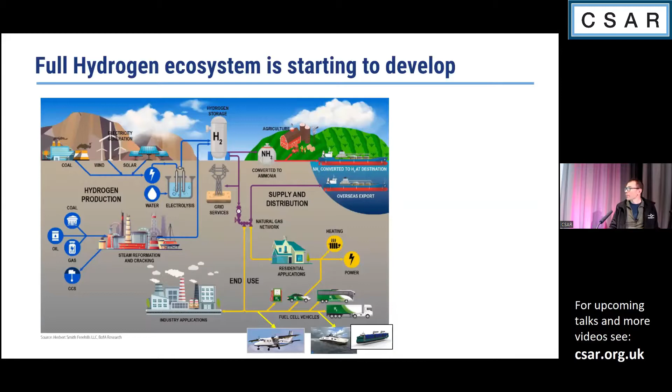Okay, so that green hydrogen can be used not only in transportation and in heating our houses, but also in very hard to abate processes. For example, in steel production, cement production or fertilizer production. And the green hydrogen will be used in those industries as well. So why are we talking about hydrogen now?

Because, as I said, hydrogen can be used in a variety of different applications which are very hard to abate. But also, the price evolution of hydrogen is incredible. You can imagine what happened to the cost evolution of renewables. About 20 years ago, it was prohibitively expensive to use solar and wind power generation, and now they are very competitive with traditional power generation.

Why? Because there was a lot of government support, of course, and the scale actually generated the decrease in the cost of technology. The same thing is going to happen with hydrogen. So the cost of the electrolyzers is decreasing. The cost of the renewable power generation, which is used to produce hydrogen in these electrolyzers, is decreasing as well.

So net, you will see that in the next 10 years, the price of hydrogen will decrease from today's, let's say $6 to $10 per kilogram, to about $1. So we are expecting a drastic decrease in the cost of hydrogen in the next years.

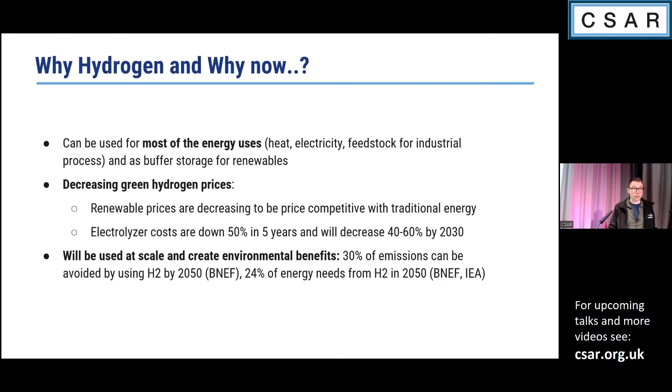And actually, a lot of very respectable sources of information, research, and analytics, for example Bloomberg New Energy Finance and the International Energy Agency, are predicting that there will be quite significant uptake of hydrogen. For example, 30% of all the emissions will be avoided just by use of hydrogen, and about a quarter of energy will be produced by using hydrogen.

So now, why are we thinking about hydrogen in aviation? Because today, aviation is contributing about 2 to 3% of global CO2 emissions. But this is direct emissions. So if you calculate the environmental impact from burning traditional fuel and using it for propulsion in aviation, then the environmental impact will actually be 5 to 6%.

Some researchers say that it can be as high as 10%, because there is not only direct CO2 production, but there is also nitrogen oxide, there is soot produced, and there are contrails which you can see in the skies when the airplane passes by.

And a lot of other industries are doing quite a bit to abate or decrease environmental impact. And if aviation doesn't do anything, we very easily go from about 5 to 10% of environmental impact to about a quarter to 50% of the environmental impact. And our travel, even now, is not guilt-free, but by 2050 it will be absolutely not guilt-free.

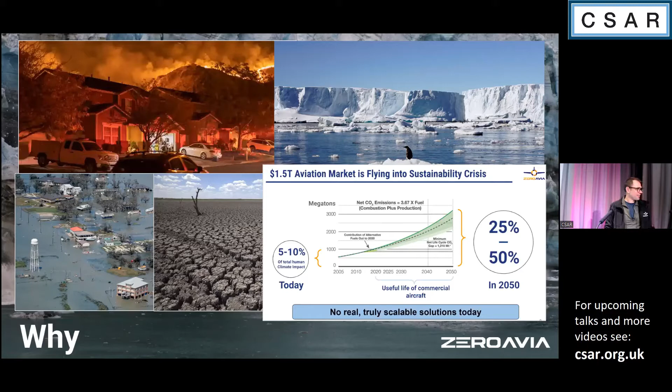And this is exactly why there is quite a bit of research and development going on right now into how to actually decarbonize aviation. And there are a lot of different techniques or sources of fuel which are considered.

And I guess the main ways to decarbonize, on top of course of the improvement of efficiency of the traditional engine and improvement of the aerodynamics of the wing, et cetera, which can reduce the emissions by about a quarter, or 25%. So then the rest will still be emissions from burning the fuel. So what are the alternatives?

The alternatives are, for example, battery electric. So we drive Teslas, we drive electric vehicles, and you can see that there are at least no tailpipe emissions which we generate by using electric vehicles. But unfortunately, battery electric is not scalable.

I think one of the executives in one of the airlines said that in order to actually fly an Airbus 320 some considerable distance, you need to have, I think, 80% of the aircraft filled with batteries. And that will allow you to pretty much just take off and land.

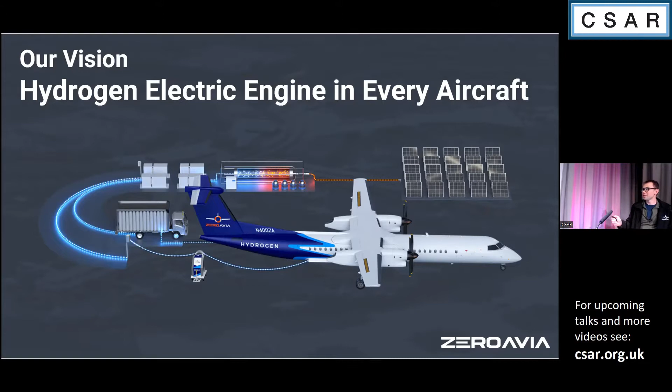So you can actually anticipate situations where the airports will be pretty much independent in terms of energy—locally produced electricity, locally produced hydrogen, and then we use that hydrogen for the aircraft.

So what does ZeroAvia do? I think what we are doing is basically solving technological blocks which will enable what I just talked about.

So the propeller is not what we are doing, but the propeller is connected to the shaft. On the shaft, we have an electrical motor, similar again to the electrical vehicle.

So the electrical motor is powered by electricity, which is produced inside the hydrogen fuel cell. And that hydrogen is stored on the aircraft in some sort of storage.

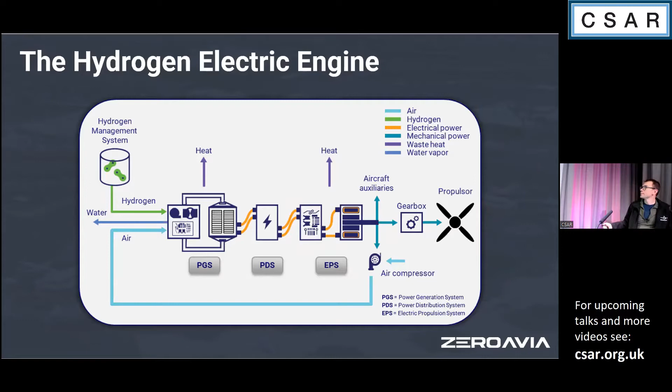So our roadmap includes, of course, flying small aircraft and then going to larger aircraft, and going all the way to intercontinental, long distance flight using hydrogen.

So we have already flown the 6-seat aircraft in 2020, and at that time we were located at Cranfield Airport and Cranfield University.

Now we have just finished ground testing of our 19-seat aircraft, and hopefully in the next couple of days we have a date in mind, but weather in November in that part of the country can be quite unpredictable. But hopefully we are going to fly the 19-seat aircraft in the next few days.

That will be the largest—when we flew the 6-seat aircraft, it was the largest commercial size aircraft flown in the world using hydrogen fuel cell technology. Now, when we test the 19-seat aircraft, we will set up and break another record, and we are going to then work on larger and larger aircraft.

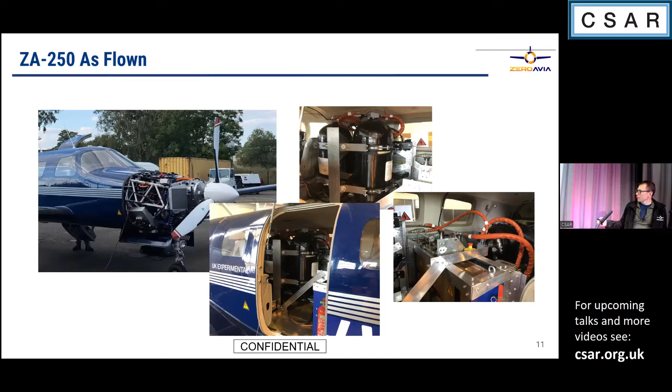And it was flown in September 2020. We had pretty impressive coverage from Sky News, BBC, etc.

And it was a very important point for aviation in general, because when I joined ZeroAvia about 3 years ago, as I said, pretty much nobody talked about hydrogen in aviation. If you went to conferences, there would be discussions about battery electric, about sustainable aviation fuel, but nobody believed hydrogen could actually play a significant role in aviation.

And it's amazing how things have changed—hydrogen is now actually considered the only scalable solution in the next few decades.

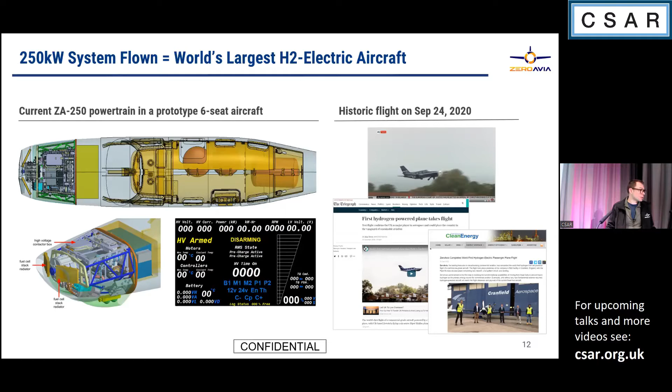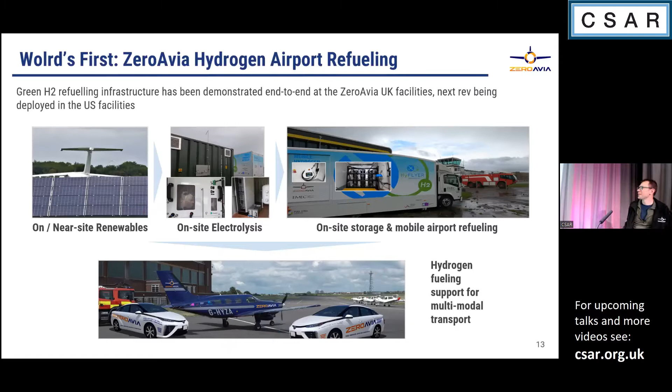And this is how small the team was. So when we flew the aircraft 2 years ago, we had about 10 people who actually worked on this.

Now we have about 130 to 140 people here in the UK, and about 50 to 60 people in the States, where we are originally from. So now we can call ourselves a UK and US company, not a US and UK company.

So when you're a pioneer in the field, it's actually hard to depend on others, and this is what we realized in the implementation of our powertrain. It turns out it's even harder to do in aviation, because every single component you put on the aircraft needs to be aviation certified.

It needs to be traceable. Every single nut and bolt you put on the aircraft, and in particular on the engine, needs to be traced to its origin.

Therefore, we strongly believe that to enable our innovation, we need significant vertical integration. And this is exactly what we're achieving by making our own electrical motors—we're currently testing, I'd say, the best-in-class, highest power density electrical motor, in our lab.

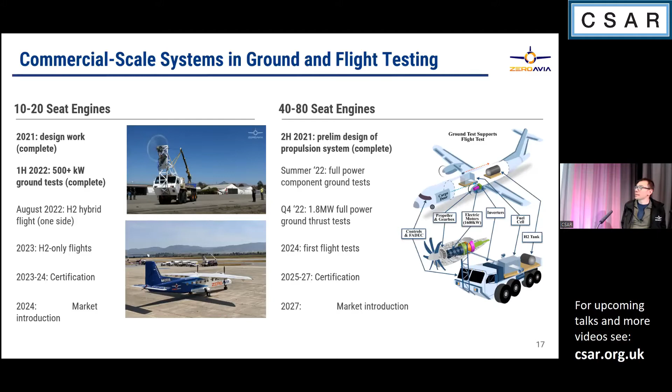We already started development, as I mentioned, of the electrical motors and hydrogen fuel cell systems, which we are testing in the labs. They will enable us to do tests on the ground, and we already have a bigger setup. It's not the flying El Camino anymore, it's a former military truck on which we are placing our Copperbird, where we can test much more powerful systems.

I won't bore you with a lot of other details, but very often when we talk to operators, to the airlines, they ask where we get hydrogen, and whether we consider the existence or availability of hydrogen as a barrier or bottleneck in bringing our dream into reality. Actually, we don't think it is a problem.

I already outlined how we implemented this solution, but there will be more and more hydrogen produced, both locally and globally. For example, hydrogen can be transported similar to how natural gas is transported—there is a huge export of hydrogen from Australia to Japan, and there will be similar setups available to transport hydrogen long distances.

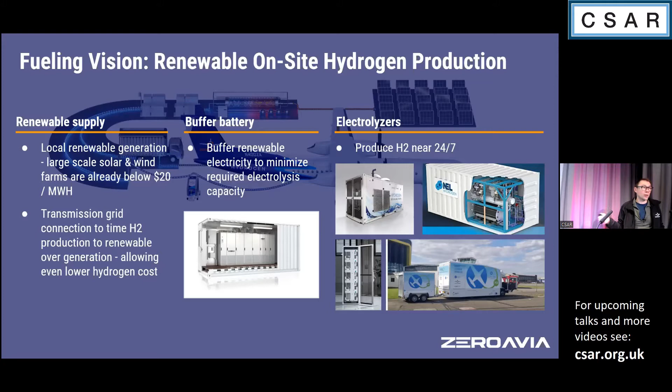But we are also working on decreasing the price of hydrogen production. The way we do it—I have a PhD in physics, and our founder also has a PhD in physics, and we are fans of making our planet more sustainable and cleaner. One way to do it is to think about how electricity is produced, when it is produced, and how clean the electricity used to produce hydrogen is. This is what we implemented with some simple algorithms.

This is an example from California. You look at the electricity prices, and you look at how clean the electricity is, and you can do it.

There are some information sources which you can pull in order to make that assessment. You can see that electricity prices are the lowest during the night, when there is too much wind or too little demand, when there is a lot of supply. And we run the electrolyzer during the time when the electricity prices are the lowest.

It turns out that very often it is during the times when it is the cleanest, and we don't use it when the electricity prices are the highest. Only by doing that, by timing it, we can actually decrease the cost of production of hydrogen by something like 20% or a quarter.

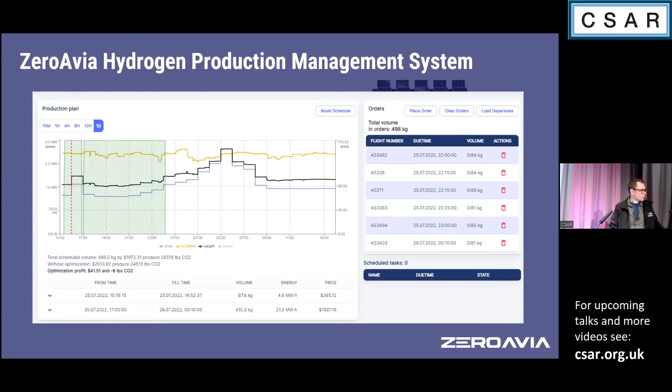So this is on the side of what we are doing, but we are also thinking not only about how to propel the research and development into the propulsion technology, but also how to make the adoption of this technology much better, cheaper, and easier for the operators.

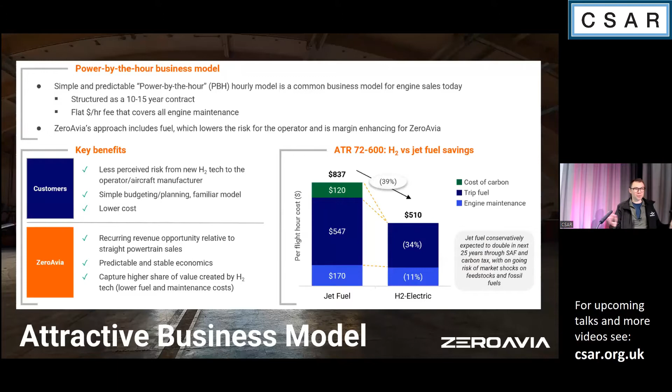And this is what we see: the cost of operation per flying hour. We did this study together with one of the airlines. It can be up to 40% smaller if you switch to hydrogen. Of course, the price of hydrogen is an important component of that, but we can do quite a bit of sensitivity analysis using different price points for jet fuel and hydrogen.

So this is pretty close to the end. Of course, this is jet zero, and net zero is a very important component of government strategy. I'm a great supporter of what the UK government is doing, supporting things which are very different from lots of other countries, being on the forefront and setting very ambitious goals in terms of emissions. That pulls all of us, researchers and industry together, to try to achieve the goals which are set up by the government, by humanity.

And we are recognized, for example, by inclusion. We are the only startup which was included in the Jet Zero Council, which is working towards development of the pathway towards zero emission flights by 2050. And we were covered, this is our aircraft at the presentation of the Jet Zero strategy.

So we love to work and do what we are doing. We love to live a dream. Compared to some of my previous work, I was working in the consulting industry for about a dozen years, I think that this is actually a better thing to do. And waking up in the morning has a lot of meaning to me and to all of my team.

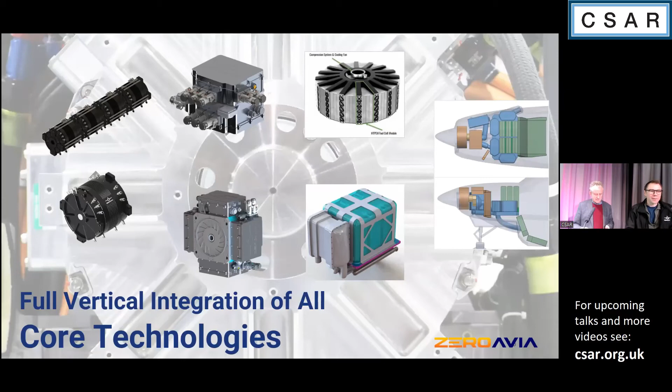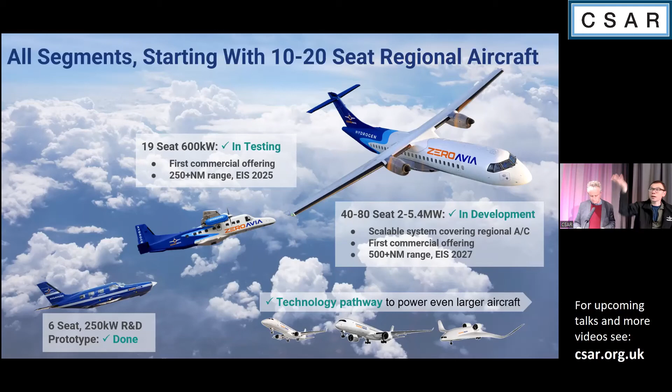And to whiz quickly through some of these questions, what about the hydrogen storage and risk of a Hindenburg event? In the Hindenburg, it turns out that the aluminum shell was actually burning, not the hydrogen itself. In our case, if you place hydrogen on the wings, under here, it's actually a very favorable configuration, because the compressed hydrogen is placed outside the 19-seat aircraft in the middle. So the hydrogen is outside, and if there is any leak in the high pressure system, hydrogen will go outside of the aircraft and up in the air.

So I've got a number of questions about power to weight ratio or energy to weight ratio, which may affect ultimate range, but also questions about how that splits between the motor, the fuel cell, and the stored hydrogen. Just some figures of merit.

You remember I mentioned that we are working on achieving the best power density for the hydrogen, for the electrical motors and the hydrogen fuel cells. The electrical motors will have something like 15 kilowatts per kilogram. The power electronics has something like 25 kilowatts per kilogram, while hydrogen fuel cell systems will have on the order of 2 to 3 kilowatts per kilogram. So from this you can infer that, of course, the most problematic part is the hydrogen fuel cell. And switching to the high temperature system gives you twice the power density.

And how does that affect power density? Sorry, power density. And what about the hydrogen storage? If you got the weight down on all those components, how much difference does that make?